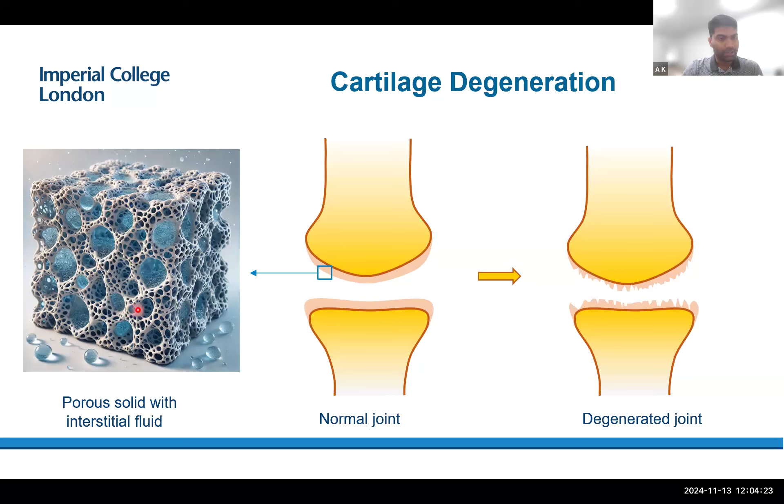The best way to visualize a cartilage is as a porous solid filled with interstitial fluid, something like this. So this is an image from ChatGPT. I tried to make a very beautiful picture of cartilage that's filled with interstitial fluid, but I couldn't make something as fancy as this. But this represents how a cartilage would look. You have a porous solid, and then there's fluid filled inside the cartilage.

With this information, let's try to understand how a bone joint works. So here we have a schematic of a knee joint. Here you can see the bones where the loads would come through. And then we have the cartilage that covers the bone surface. And this entire system is covered in a synovial bath.

Now, what happens here is when you walk or when you involve in activities, these joints would oscillate against each other, and then there will be this synovial fluid that will go into the cartilage, and there will be synovial fluid also coming out of the cartilage.

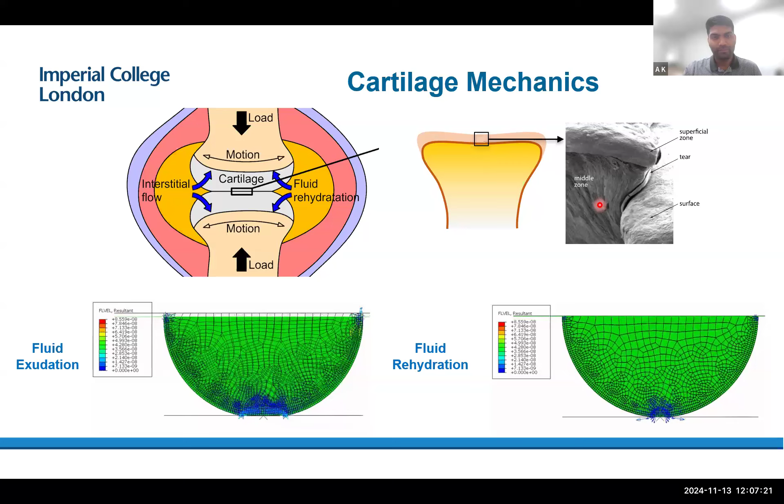All right, so before we proceed to the further slides, I'd like to ask you a very simple question. So here we have a very thin space. Just imagine, the thickness of this is in the range of micrometers. And if a fluid is supposed to flow in this particular region, the pressure that will be generated in this fluid will depend upon which fluid parameters?

Will it be velocity? Will it be viscosity? The flow geometry, just as you can see here, or all of the above? I'll give you 15 seconds to answer this poll, and after that, we'll move forward.

Do we have the polls answered? For some reason, I can't see the poll results. Can you see the results now? Yeah, I can see the results now.

All right. So I see most of you have answered, 67%, all of the above. If you answered velocity, that's right. If you answered viscosity, that's right. If you answered flow geometry, that's right. But for this particular context, the most appropriate answer is all of the above. So this information will be very necessary for us as we move forward to the modeling part.

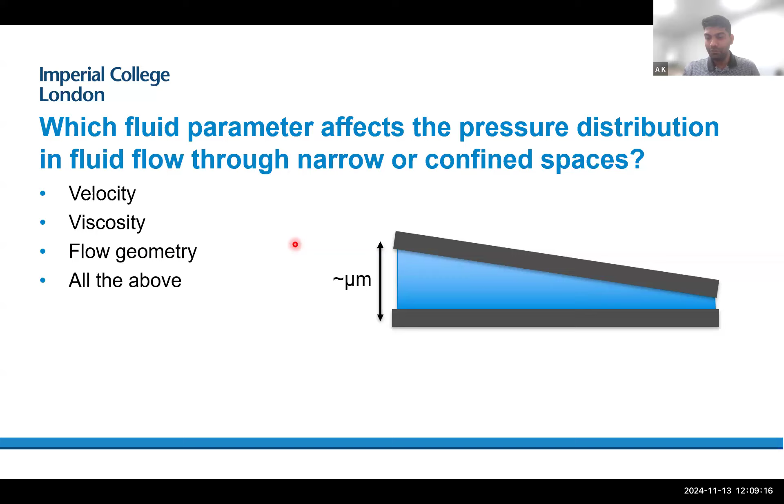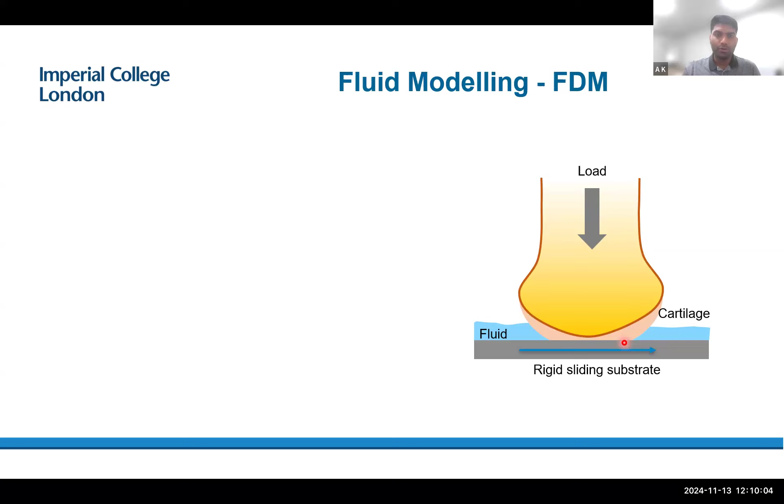Now, this is very similar to the example that you saw before, in which a fluid is flowing through a very narrow, thin space. In this particular contact region, the space is very thin. It's in the range of micrometers, and the fluid has to pass through that space. In tribology, the most famous equation that's used to model the flow passing through thin space is the Reynolds equation.

Now, this is the point where we differ from the classical Reynolds solving to what I'm doing here. If it's a conserved flow in a classical Reynolds solving method, the material here will be mostly a solid material. So the fluid wouldn't be able to pass through this particular solid. But in my case, as the fluid can pass through the cartilage, I need to take account of the fluid that's going into the cartilage and coming out of the cartilage.

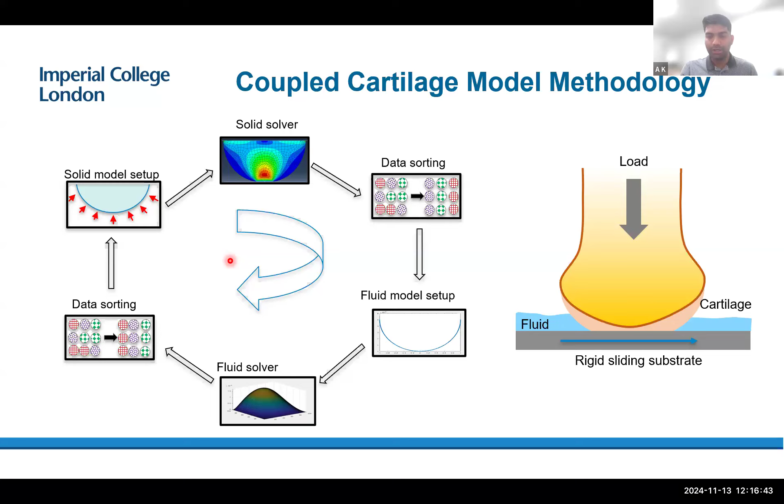To best understand what I said before, this is a small video that explains how this problem works. In this problem, you'll be able to see a circular shape and then a pressure that will be developed. And then the model will keep on running. So I'm just going to play this video here.

So as you can see, this particular solid model keeps on deforming with the fluid pressure. And this keeps on deforming until a point where the fluid pressure will no longer change, and then the deformation will also stop. So this is a typical converged solution for our problem.

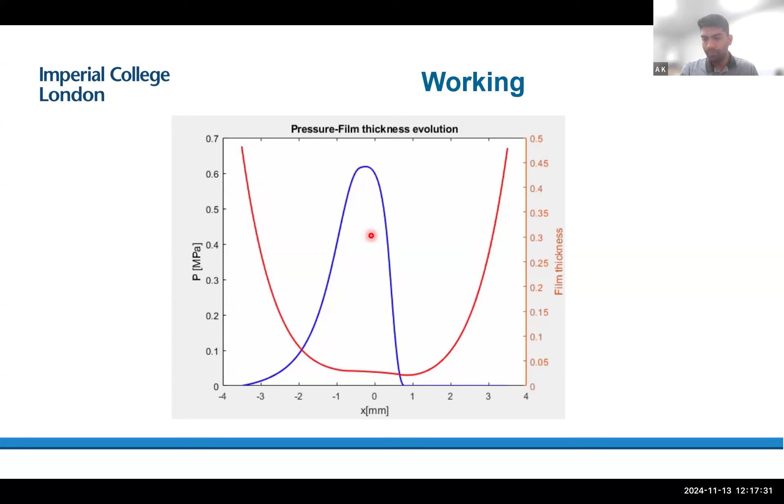Now, as with any modeling work, the first thing that we need to do is to validate our model with the classical models that are already available. So in this one, we have a model that's built with porosity, and we took this particular porous model and put the permeability equal to 0, which means there'll be no exchange of fluid happening within the porous model, which would be very similar to how a typical solid model would work.

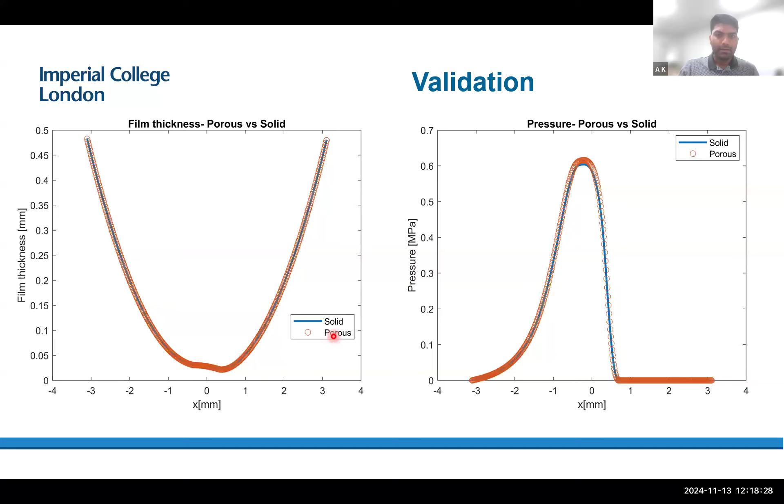All right, time for a second poll. This particular activity will help to understand the results much better. So what is your favorite activity to do during the day? Which one do you all prefer most? Walking, jogging, running, or any kind of sports or gym? I'll give you 15 seconds to answer this poll before we move forward.

All right, so I see a lot of people answering walking, jogging, running, sports. So we have a good mixed kind of response here. All right, so with that, let me move on to the next slide.

Okay. So the intent of asking the previous question was just to get into your mind different kinds of activities, especially walking, jogging, and running. With these three activities, walking is a slow speed activity, in which your cartilage would move relative to each other at a significantly lower speed. But when you start jogging and running, the speed of the relative movement of the cartilage keeps on increasing.

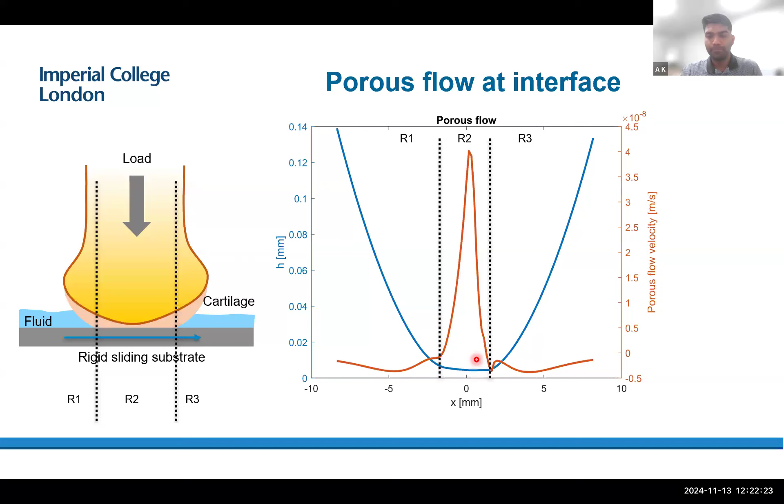Now, as we saw before, as we increase the speed, there's fluid going into the cartilage through this particular contact region. What we also see is if we increase the sliding speed, there's more and more fluid that's going into the cartilage.

Now, the best way to understand these results is: usually if you stand for maybe 10-15 minutes, the cartilage would keep on being compressed and the complete fluid in the cartilage would be lost. And after that, if you were to make a short run, your cartilage would absorb all the lost fluid much quicker than walking or jogging. That's the best way to understand these results.

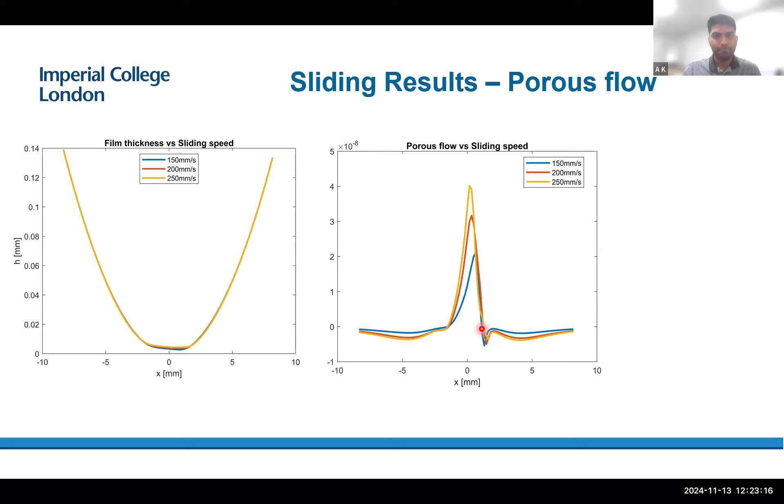Now, we also did a bit of testing on the permeability. The normal permeability of a cartilage is somewhere around 10⁻⁸. So we did it with an increased and a lower permeability compared to the normal permeability of cartilage. What we understand here is when we increase the permeability, there's more fluid that's going into the cartilage.

Now, if you don't understand the complete picture, you may get confused into thinking that increasing the permeability of a cartilage is a good thing, but that's not actually true. The reason I say that is because it's not just the fluid that's going into the cartilage, but if you see this particular portion, there's a good amount of fluid that's lost from the cartilage as well.

So if you see the net amount of fluid, even if it's a small fluid gain, due to the high permeability of cartilage, it wouldn't really be able to hold that fluid within the cartilage. It would be lost the minute you start loading the cartilage.

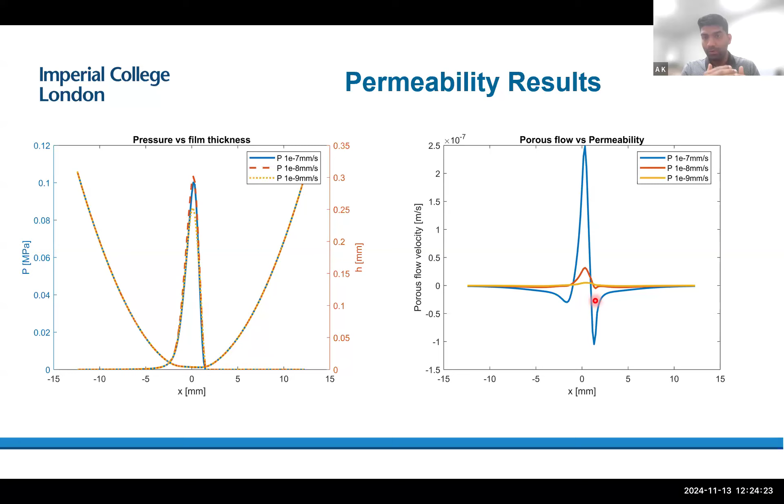All right, so that was all about the presentation. A quick summary of what we have done so far. The biggest thing in this presentation is building a fluid-solid coupled model. We have successfully been able to incorporate surface roughness into the model. We have been able to make this model porous, which means that it can take into account the interstitial fluid within the cartilage, and we are also able to calculate the flow going into the cartilage and the fluid coming out of the cartilage.

Two quick results that we saw: one being the sliding velocity, which means if there's more sliding velocity, there's more rehydration in the cartilage. And then if we increase the permeability, this is more applicable to osteoarthritic patients. Usually if a cartilage is damaged, the permeability of the cartilage increases. In that case, the rehydration rate actually decreases, causing the cartilage to quickly compress, and then the bones would directly come into contact, putting them in excruciating pain.

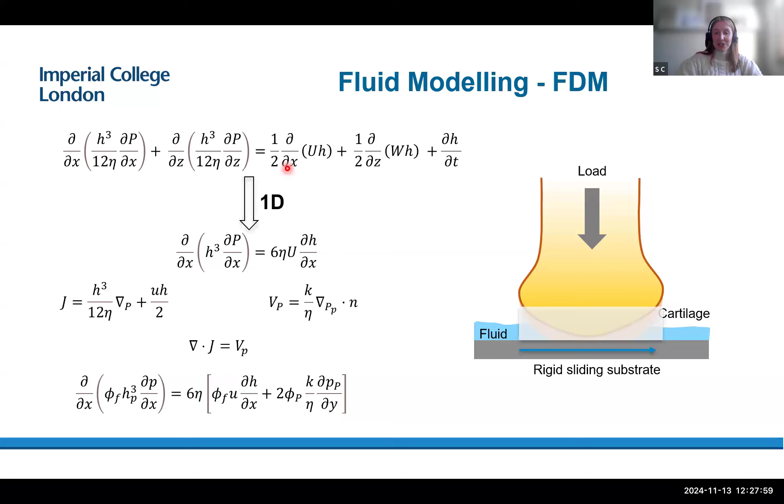Thank you for that. And the next question we have is, how do you model the surface roughness? Great. So the surface roughness is taken care of with the help of flow factors. I haven't put those equations on this particular slide, but these flow factors are a function of surface roughness. I'm using the Patir and Cheng surface roughness model to take that into account. So what actually happens is these flow factors will always have a value corresponding to the roughness, and these flow factors will modify the wedge term, the pressure term, to take that particular surface roughness into account. Thank you for the question.

We've got another question for you. If you modeled the asperity deformation, what material properties have you captured for the deformation? Very interesting question. So at this point, we are not modeling asperities as such. The cartilage here is a FEM model. The surface roughness which I was talking about is more incorporated into the Reynolds equation of the fluid, because the surface roughness is more to do with the fluid that's actually flowing outside the cartilage. That's the reason why we did not model asperities in this particular solid model. Good question. Thank you.

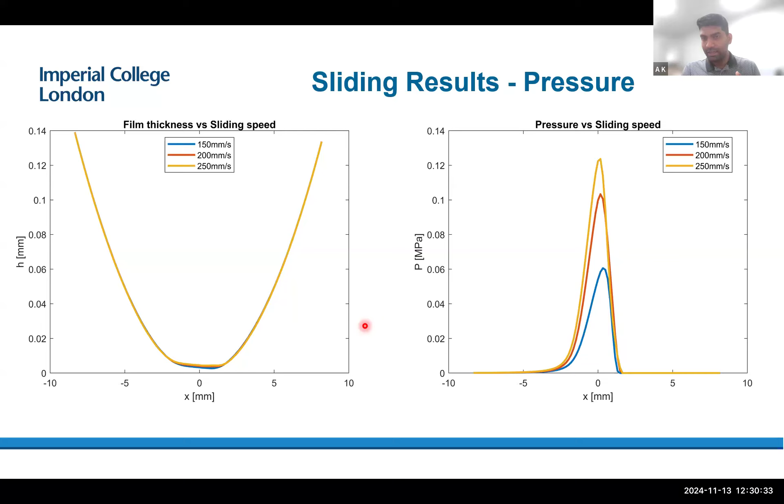I've got a question for you, if you don't mind, Arshad. Sure. So you've talked a lot about those activities of daily living, the running, the walking. In your model, have you thought about simulating some of those sit to stand activities that you might see in these patients with osteoarthritis, just the basics? Oh yeah. So at this particular point, the model is only capable of doing dynamic activities like walking or simulating running cycles. To do stationary activities like standing or sitting, we need to have a slightly different version of this, which I plan to build in the very near future. Thank you for that question.

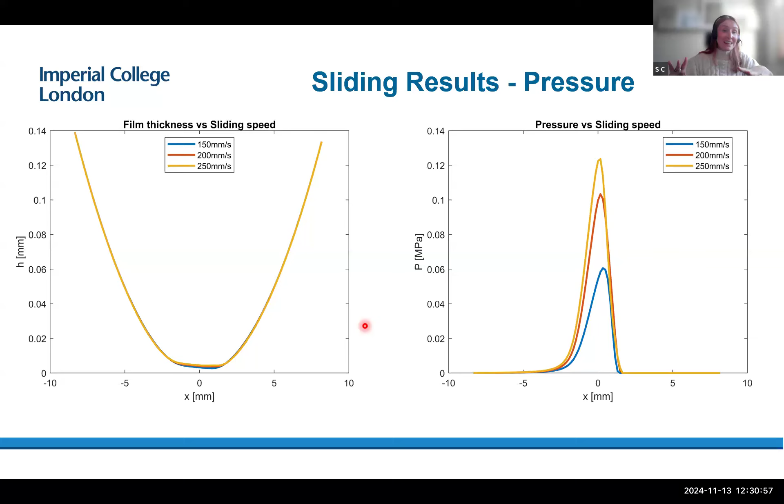And then one more follow-up, if you don't mind. So with your model, you've done quite a simplified geometry initially in terms of the bone and the loading and the interface surface. Further down the line, have you considered how threading in a more realistic bone geometry will impact what you're seeing in your model? Exactly, yeah. So these are the things that I have in my mind to do in the future for this particular project. It's a lot of work.

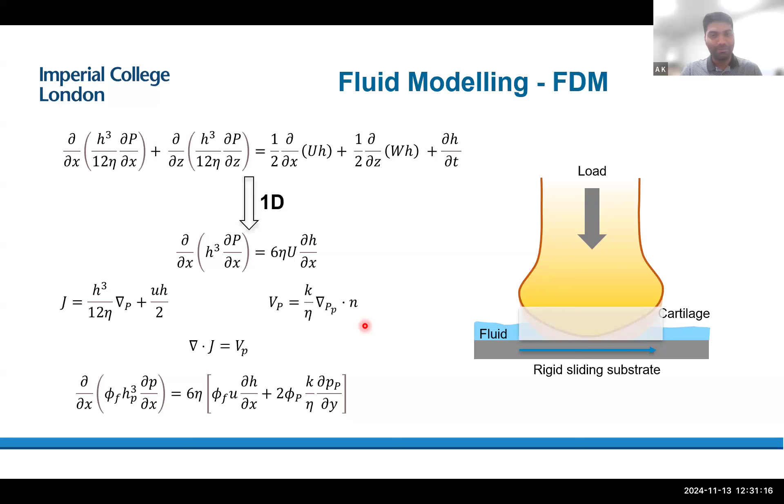Yeah. So at this particular point, we are more focused to build this complete model and get some realistic results with the experiments. So once we have confidence in this model, and when we do the correlation with the experiments that we already have, that's when we would try to develop a 3D model, which would be a very realistic model of a bone and cartilage, and then do some real kind of simulations. Thank you. Oh, brilliant.